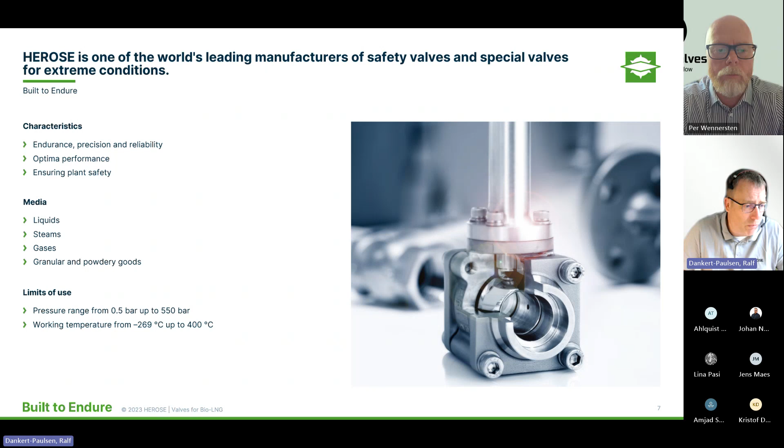Our main products or limits of use are valves ranging from DN10 up to DN200, so 8 inches is our largest globe valve. You can use our valves in liquid applications, steam and gases, or safety valves for granular and powdery products. Our pressure ranges go from 0.5 bar set pressure up to 550 bar set pressure, and we are currently aiming also for a 1200 bar version for the high pressure storage of hydrogen.

Just a quick overview, not going too much into the details, but our goal is to provide you with a German-made but globally certified product. So you can use our safety valves, for example, in China, in the UK, and in the United States. If you are an OEM producing equipment, you can use our valves in your specification, and you just need to differ the approvals for the export destination of your final product. HEROSE also invests a lot of money into marine class approvals. When you see here ABS, Lloyd's Register, or RINA, this was a big effort for us to go back into the marine industry with the LNG application on LNG fueled ships.

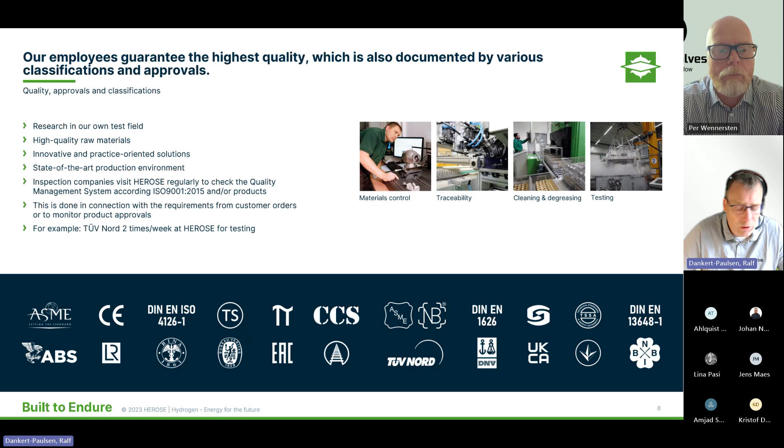What is characterizing us is we operate our own test field. As you can see here in the slide, we have an intense quality observation department. I think every week, or at latest every second week, we have auditors either from customers or from third parties in-house to have our quality systems and our processes checked, either to qualify us as a supplier, recertify us, or something similar. Since end of 2023, HEROSE is also holding an approval according to ISO 14001, which is not mentioned here. I need to correct this.

You have a small-scale liquefaction plant. You have LNG distribution and storage. You have then the storage and distribution at the end user. This could be an LNG or LCNG fuel station when it goes to LNG vehicle fueling. Or you have regasification systems where you can either supply a smaller town or smaller village with gas supply via a small local grid, or you can inject this into consumption, for example, electrical power generation.

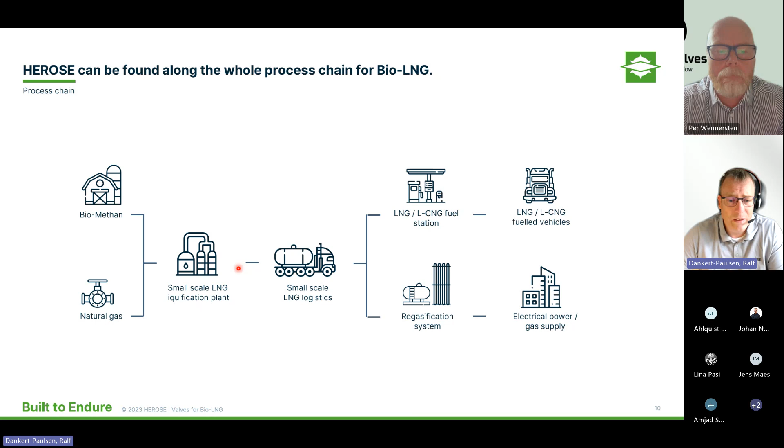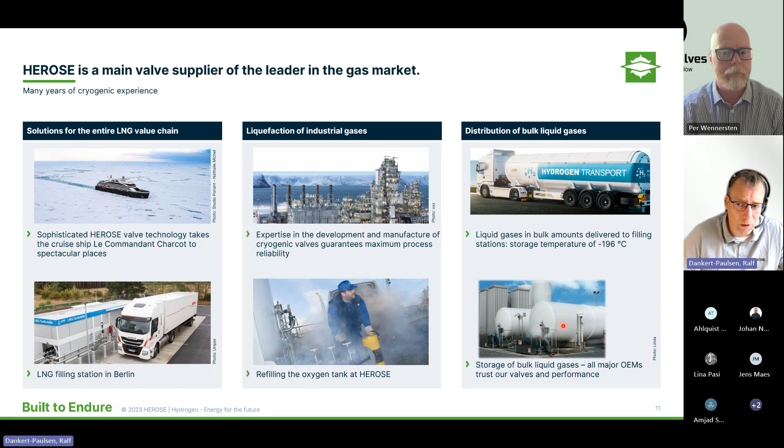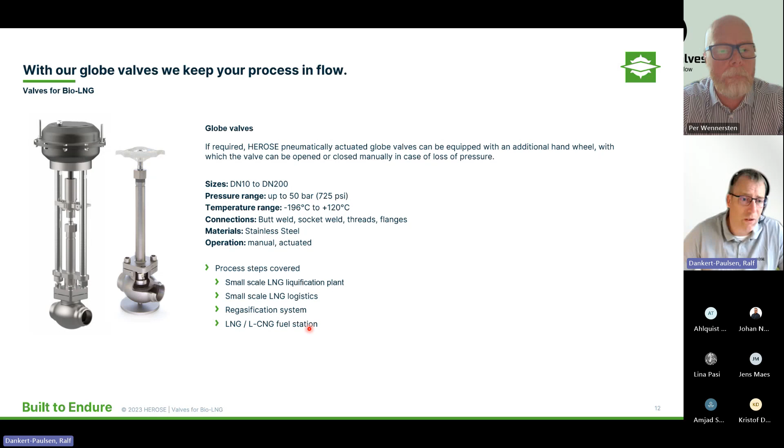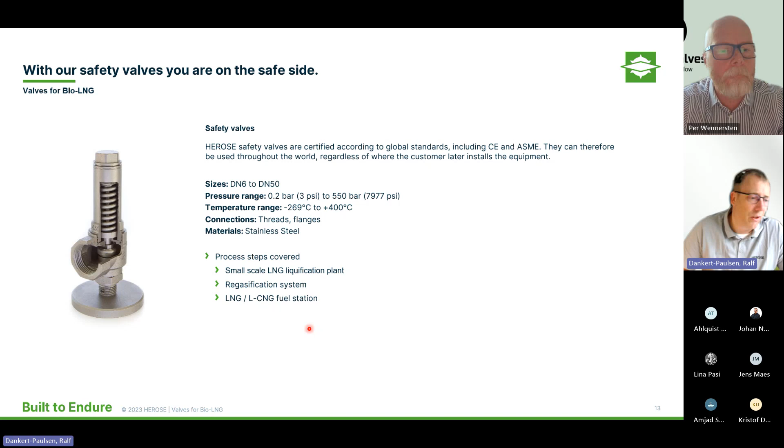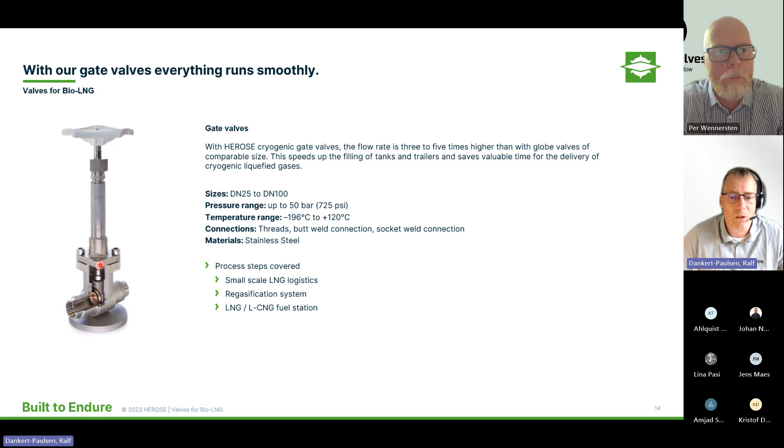But with this valve design, you also have only sealing in one direction, so the flow direction needs to be observed, and the pressure normally is always on the back side of the disc to push the disc towards the seat to improve the sealing performance. And you have a larger valve body in order to move the disc out of the way. So it has both, similar to ball valves. All 3 valve types have different advantages and disadvantages, and it really depends on the process needs what to choose.

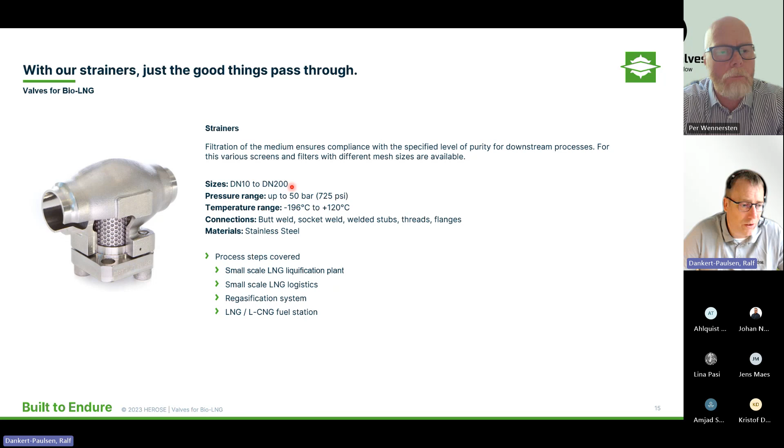In these processes, you also want to avoid dirt accumulating in your systems, in your plants, and therefore HEROSE is also providing strainers. And if you look in detail, you will see it's the very same bodies. We use the same bodies as we use for the globe valves to build such strainers, and therefore we have the very same size range, and these strainers can be used everywhere you want to avoid particles going into your system. So typically you install such strainers at the entry points before sensitive pumps or sensitive safety valves where the particles can cause damage to your valuable equipment.

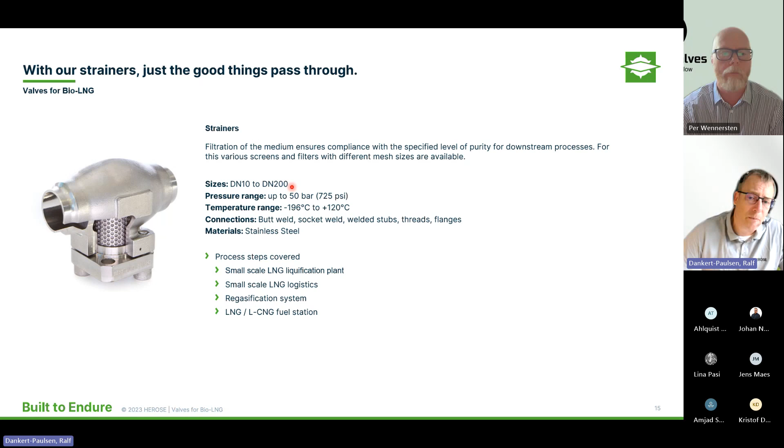Also based on the same bodies, we have check valves in our portfolio, and these check valves use a small spring to keep the valve closed, to support the closing process, and also to support the orientation of the disc, so that we make sure that the disc is parallel to the seat and gives smooth and tight sealing.

Here we can avoid backflows towards pumps if you have a bypass line or something like this. So the application is also depending on the process needs. And temperature ranges and connections are, with all these 3 valve types - globe valves, strainers, or check valves - always the same variances as we use the same bodies. So I don't want to bother you now with repeating all the details again and again.

Normally the opening pressure for these check valves is around 0.1 bar, so very little pressure difference will open the valve. And for those of you who do sizing of systems, you need to pay attention to the required flow capacity compared to the CV value of the valve, because if the required flow capacity is much lower than the flow capacity of the actual selected valve, you may have very unstable working conditions, and the valve will start to open and close very frequently.

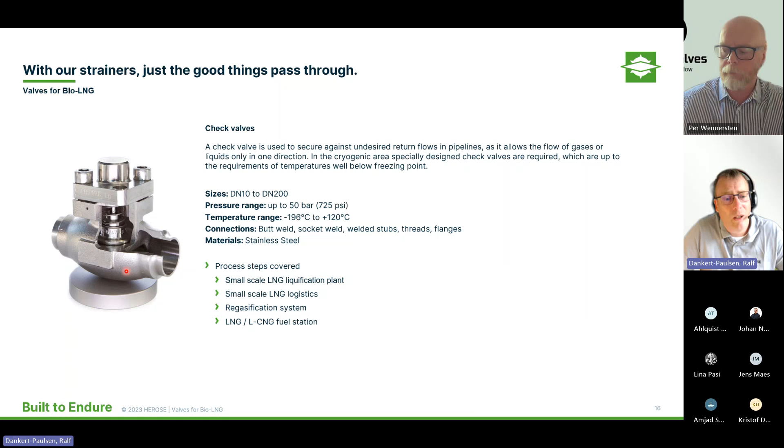Then you have a risk of damaging the valve seat. So here you need to pay attention, and you should minimum, in our case and for our valves, select a valve where the actual required capacity is minimum 50% of the specific valve's certified capacity according to the data sheet. We've had experiences in the past where companies and plant designers chose larger valves in order to get the flow speed down. But with this, they got rid of one problem with flow speed and turbulent flow, and created another problem with hammering and chattering valves, and both are not good. So it needs to be sized right.

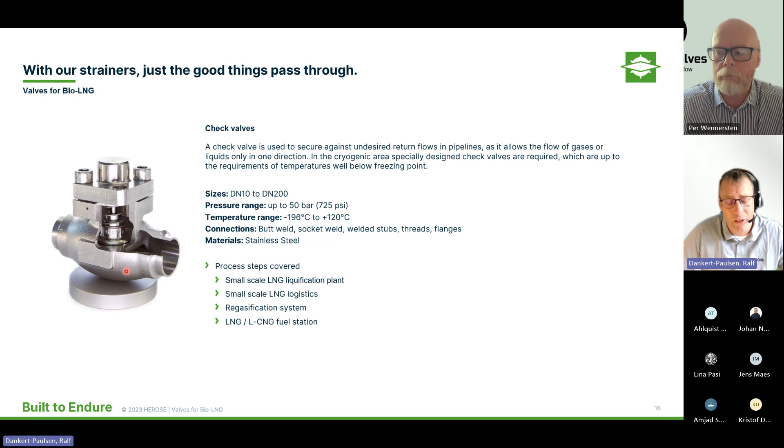Regarding this, what you have seen now is our standard portfolio of valves, and what you see here is also further developments and designs available for more demanding applications. For example, fire safe design, where the valve has to undergo a test according to this ISO standard, where the valve is exposed for 30 minutes to an external fire.

Then it has to be cooled down to cryogenic conditions again. And in both cases, it has to be tight, so that no further fuel is added to your maybe already existing disaster, and the valve keeps the LNG in the tank at least for a certain moment of time, as long as the sealings can withstand this temperature influence.

What we also do is, according to customer requirements - what you see here is, for example, a globe valve where we added a cover for the first valve at the normal valve butt weld connection, and with this we create a second barrier around the pipe for measuring the quality of checking external or internal leakages of the LNG.

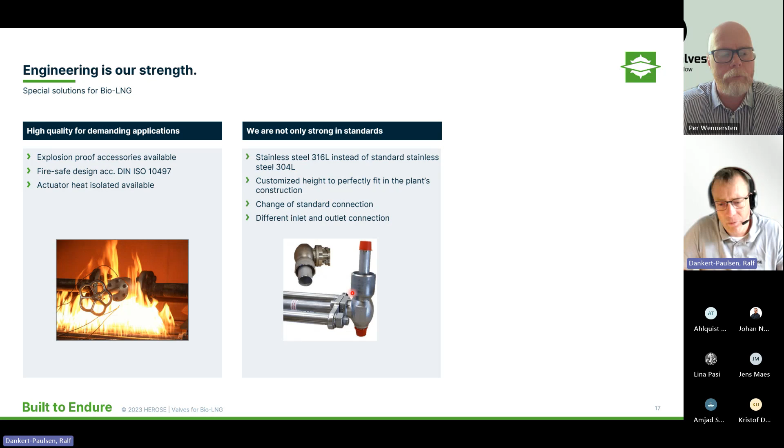This is very often used at ships, because especially on cruise ships, where you have maybe 3,000 passengers sitting on the ship and maybe 1,000 or 1,500 people of crew - so a little city traveling on these ships - and the marine classes have very strict requirements for the safety of the first valves at the tank.

I think, yeah, I have 2 minutes left, so it should be fine.

What we as a company can provide together with Ramén to you is support in commissioning. We can do preventive maintenance and also maintenance service on demand on site if you wish. And of course, we hold a stock of parts, and we can ship these parts in a decent, fast shipping transit time to you, and have your plant up and running again as quick as possible.

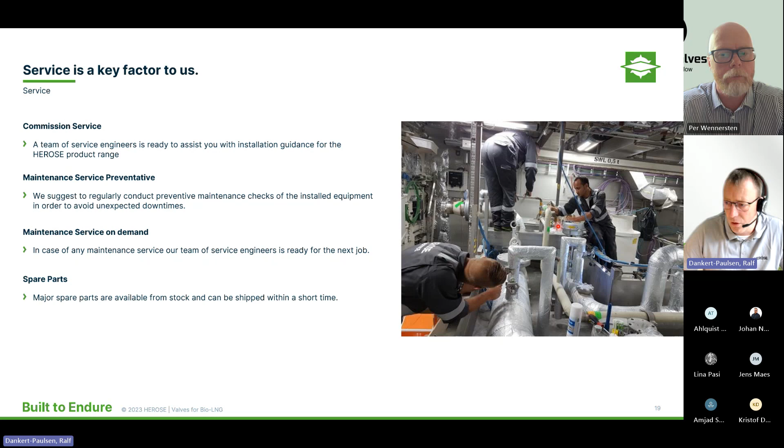Here in this picture, you see our service technicians on board of a cruise ship, where we support the yard with the installation of the valve.

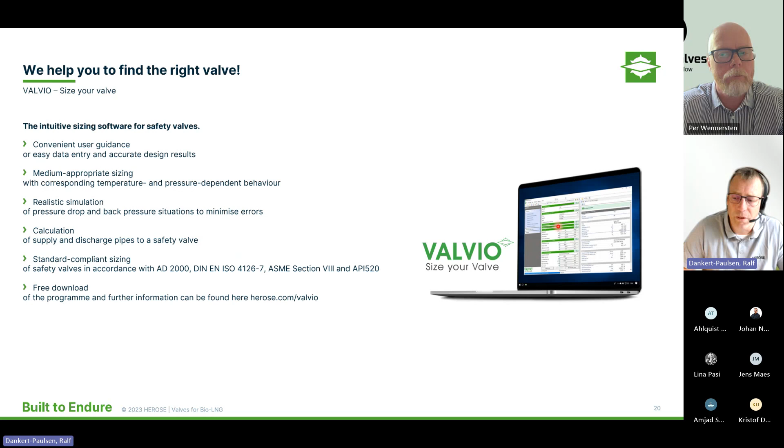Also, what we provide free of charge is a sizing software for our safety valves. There you can enter your required parameters, and this software will help you select the right safety valve size to make sure you have a proper functioning valve and a proper, hassle-free operation of your plant with correct protection.

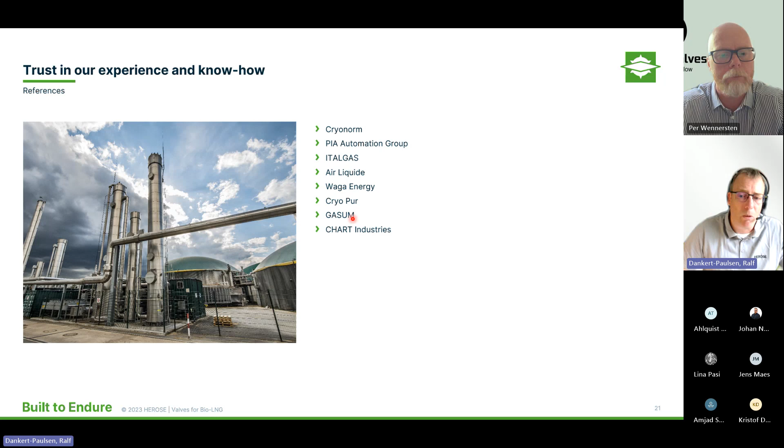Some references for LNG: we supply, for example, Chart Industries, or companies like Gasum in the Nordics are using our valves to a certain extent, where we are the main supplier for cryogenic valves. HEROSE is a specialist in cryogenic valves, and we have been doing this for a long time. LNG for us, in the last 10, maybe 12 years, just became another cryogenic fluid which our valves can handle, and they can handle them quite well.

Thank you very much for your attention, and I will hand over back to Per and stop sharing my screen. And then I think we have some time left in case you have questions.

Thank you, Ralf. Thank you very much. Thank you. Very interesting.

Yes, did we get any questions in? I asked Lina to see if there were any questions. No questions so far.